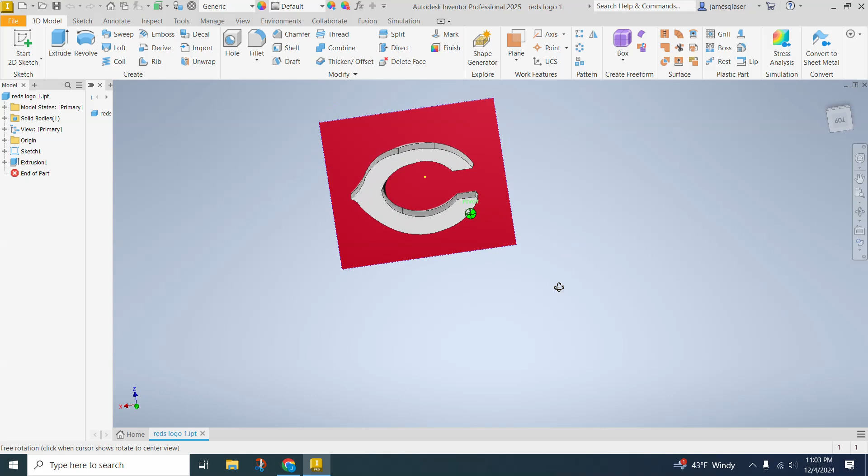Today's topic is we're going to take a logo you like, or an image or picture, and turn that into a 3D printable object, or make it part of your 3D printable object. With this technique, you can add this to any 3D model you have, and make it any size you want. It's just whether it will be large enough to come out with a 3D printer at your resolution. So let's go ahead and get started.

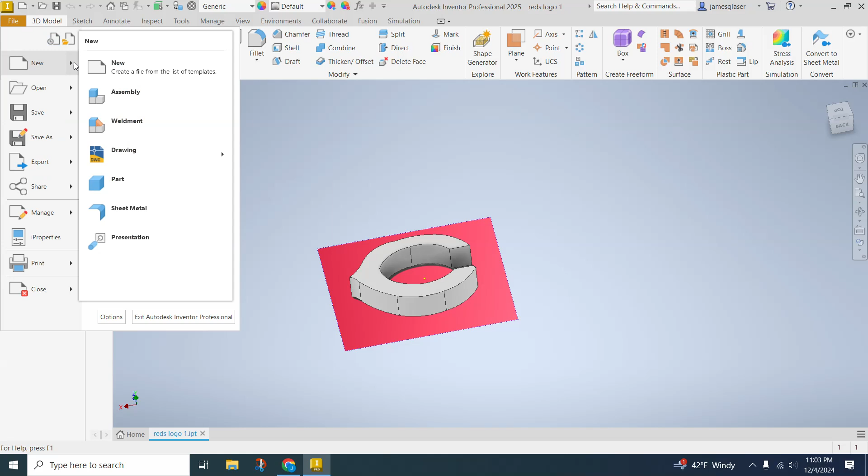We're just going to get started in our normal fashion. We're going to do a new document, a new part, and we want to make sure that we are in a millimeters part.

Now, if you have a size in mind as to how big you want this thing to be, I would suggest you start by making a rectangle, square, circle, or something along those lines. Ooh, I'm in inches, that's not going to work for me. Tools, document settings, units, millimeters, apply, close. Try that again.

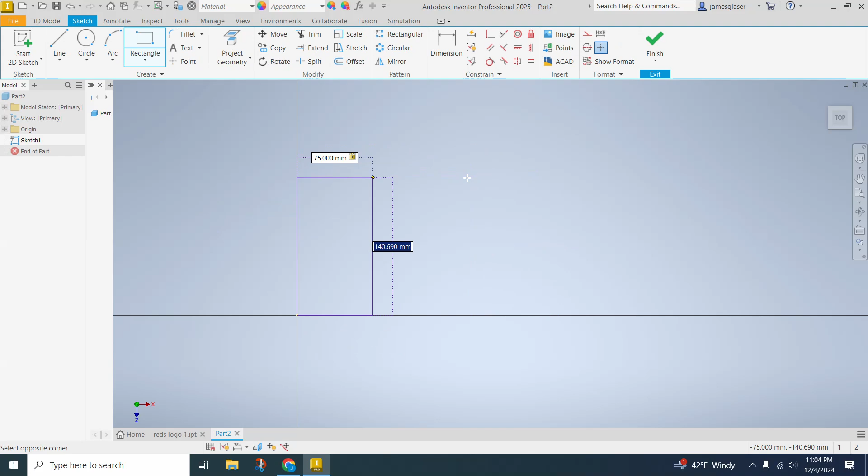There we go. So one recent project, I said 75 millimeters by 75 millimeters. Just by drawing that little square out will help you understand how big your insignia actually is, or how big your image is.

Now, if you want to place this on something or into something, you can go ahead and extrude that, and that way you have a solid object to place it on. If you want your insignia shape to be the outside limits of your object, you don't want to do that. You will just want to extrude it.

So what I'm going to do right now is first off, find the image. I'm just going to do a simple Reds logo. If you find a PNG file or an SVG file, those are the best ones, the easiest for you to copy and import into Inventor.

So what you want to do is find your file, find the image you want, right click it, and say Save Image As. Save that into your flash drive in the project folder you're going to use, so you always have it there in the event something happens, and you know exactly where it is. You don't have to go hunting for it.

I already have it in there, so I'm not going to save it again. But what I am going to do is come up here to, let's see, I need to be in my 2D sketch. So I'm going to start it on that surface, and now I'm going to place an image.

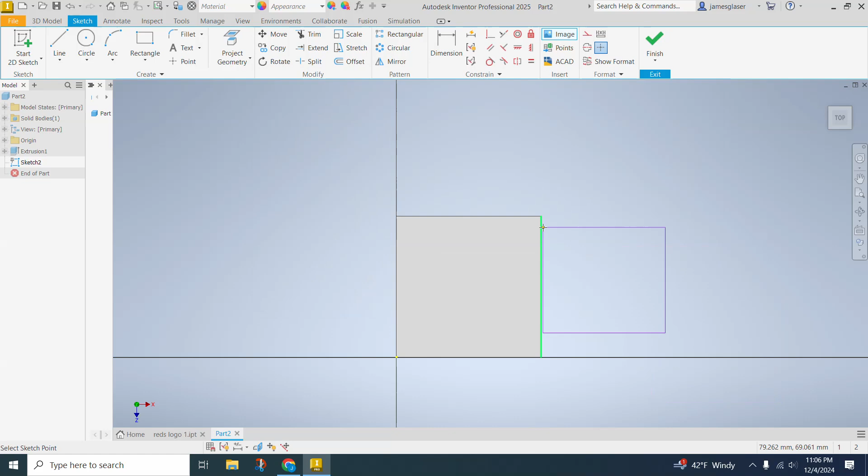I'm going to come here to the insert portion of this and click image, and then I'm going to find it. Since it's a format it'll actually read, you can tell because it's reading it. I'm going to click OK, and go ahead and place it right there.

Cool. Now, if that's the way you like it, if it looks good to you, great. If not, you can feel free to move this thing about. You can also scale this thing and increase its size, decrease its size. You just play with it a little bit and make it the way you want it to be.

Now, once you finish that, that is just a part of a sketch. That's not an object yet. If we were to 3D print, like create an STL and print this, this would come out as a rectangle and nothing more. So in our sketch, what we now need to do is start some lines.

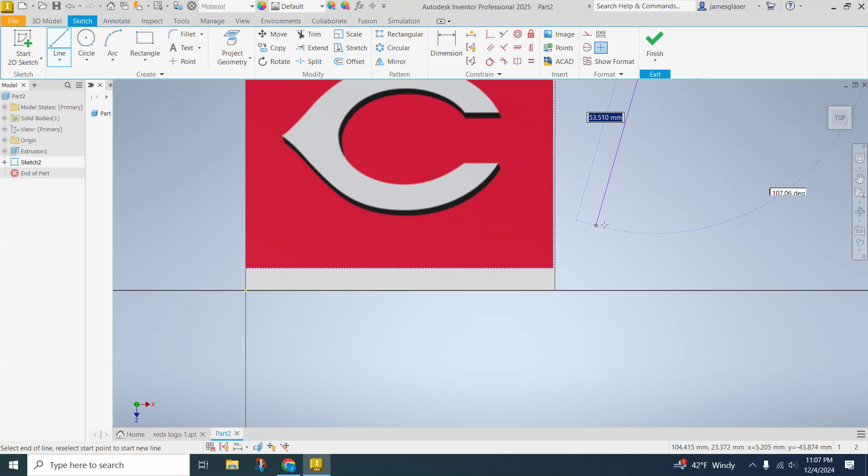So I'm going to grab my line tool. First off, I want to be looking straight on - oops, accidentally tried to drop a line over there - and just start clicking. Notice when I'm just randomly clicking or hovering over this, it does not give me any options to do constraints on this.

I have to start making the lines in order to do that. Okay, so I just dropped my first line and it's wanting to continue making lines. I'm going to hit escape to drop that tool.

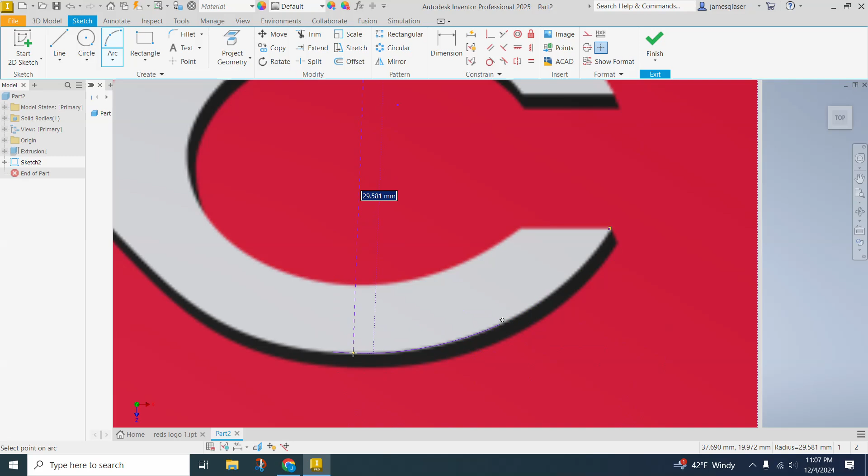I'm going to come over here to my arc, and I need to make sure that I am getting that green dot of a coincidence constraint. Every one of your lines has to be a continuation of the prior line. So you have to make sure you are locking onto the prior section of the line in order to make it a closed object.

So what you just want to do is do your best to trace the emblem. Depending on how much time you take, you will get a better product. I'm just going to try and do this rather quickly because I'm sure this is boring. But make sure you get your coincidence constraints - those little green dots.

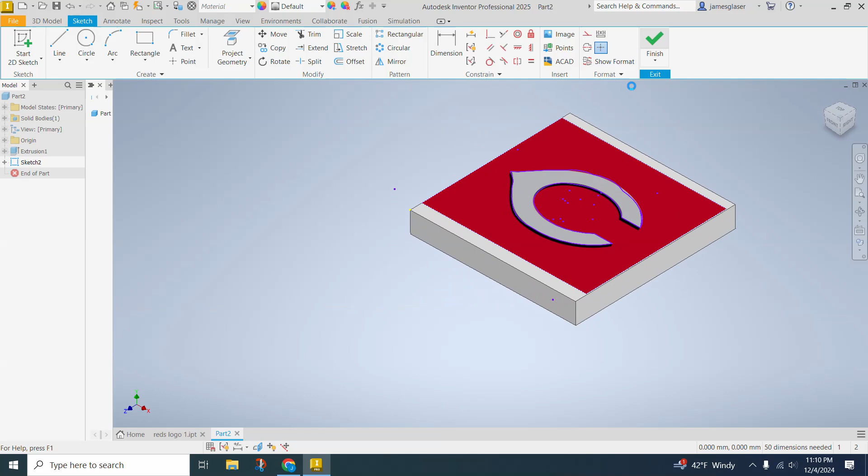All right, so that should be it. Now I hit finish sketch, and you see how it kind of turns gray there? I can click my extrude button, and now I can extrude that. That's essentially what you have to do.

Now, the more complicated your sketch is - ooh, that's pretty ugly - the more time you take, the better it turns out. And the more complicated your image is, the more difficult it's going to be. If your object does not extrude, that is because it is not a closed shape.

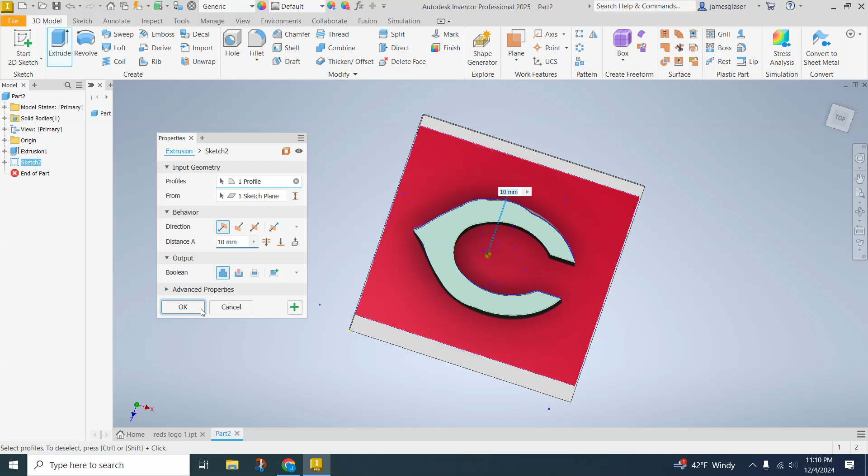And you have to go back through, and you can easily, if I go ahead and click cancel here, go back into it, say edit sketch, and use my trim and extend tools to try and figure out what's going on and why it's not showing up correctly. But yeah, it just becomes this tedious process of trying to make it work. So hopefully this video helped you out, and take care.